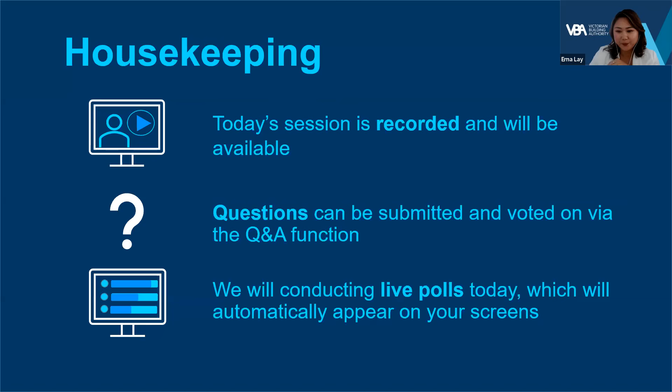Good afternoon all. My name is Christian Williams and welcome to our Practitioner Education Series webinar on waterproofing of wet areas. To assist the industry to prepare for the changes coming in on the 1st of May 2023, and in order to reduce the risk of non-compliant installation of waterproofing systems that can lead to defects such as water damage and deterioration of building elements, this webinar will provide an understanding of the key changes for waterproofing of wet areas for NCC 2022.

At the conclusion of this webinar, viewers will be familiar with waterproofing requirements applicable from the 1st of May 2023 under the NCC, and will be able to identify key areas to achieve compliance and in turn reduce defects.

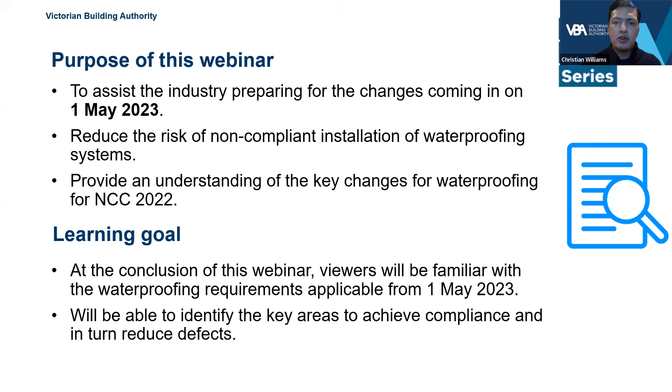Today's presentation will cover the new changes to NCC 2022 related to waterproofing of wet areas, as they differ from the provisions of NCC 2019 Amendment 1 version of the code.

We will also be covering some of the changes to the requirements of Australian Standard AS 3740 from the 2010 version to the 2021 version of the standard, which is going to be referenced in NCC 2022.

We will outline requirements related to performance solutions, such as the process for formulating performance solutions, and some specifics, such as departures from the waterproofing system specified under AS 3740.

The documentation required for the issue of building permits will be discussed, including evidence of suitability.

And to complete the webinar today, we will be going through some of the frequently asked questions live.

Before we take you through the waterproofing requirements, we need to mention one of the main changes to the NCC, which is the new SPTC referencing system.

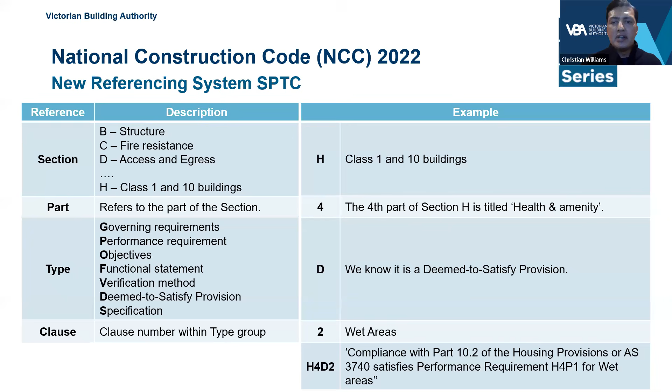The sections are then divided into parts. A section can have multiple parts dealing with different aspects relating to the section. In our example, it is Part 4, to do with health and amenity.

The type can be one of 7 options, as shown on the left, such as governing requirements, performance requirements, deemed to satisfy provisions, and specifications. In our example, the type is D, which stands for deemed to satisfy provision.

The clause is always a number, and in our example, the number is 2. So if I go to the reference H4D2 in Volume 2, it'll give me the deemed to satisfy provision for wet areas.

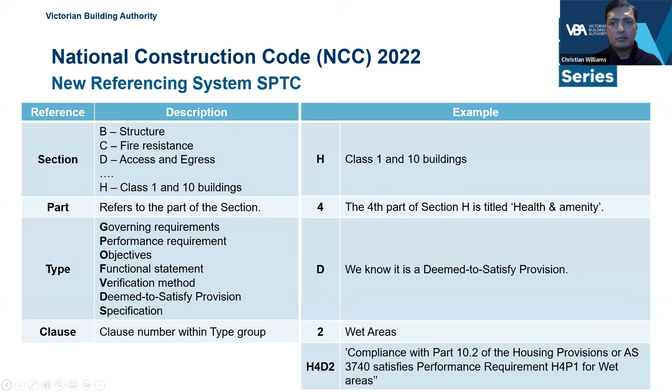The waterproofing requirements for Volume 1 of the NCC come under Part F2, which references compliance with Specification 26 and Australian Standard AS 3740 2021. Whereas Volume 2 of the NCC references compliance with Part 10.2 of the ABCB Housing Provision Standard 2022, or AS 3740 2021.

Of note is that despite using AS 3740 to achieve compliance for wet areas, Clause 10.2.1 to Clause 10.2.6 of the Housing Provision Standard must still be followed.

The main difference here is that the pathway under Volume 1 requires compliance with both the specification and the standard, and Volume 2 requires compliance with either the housing provisions or the standard.

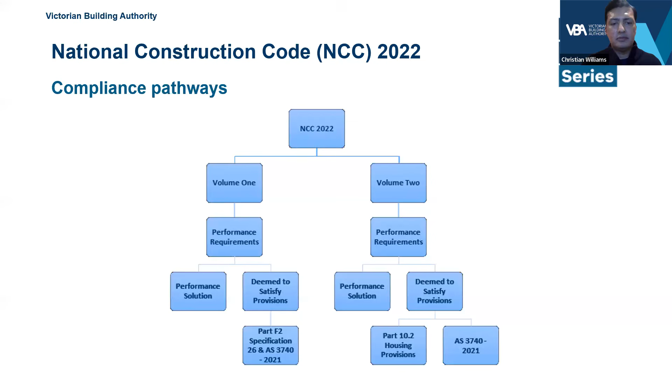Many of you will be familiar with the current waterproofing requirements under NCC 2019 Amendment 1. However, for NCC 2022, new waterproofing construction details have been added to Volume 2 under the housing provisions. This essentially means that there is now a new option for a deemed to satisfy solution that does not fully rely on having access to AS 3740 2021.

So you're all probably wondering what the differences may be. Well, there are a few differences between the NCC and AS 3740, which we will discuss. AS 3740 does contain specific construction details and options, as it is a standard dedicated to waterproofing. It's been updated in 2021, which is now the reference version for NCC 2022.

Information about the areas that are required to be waterproofed or water resistant can still be found in the NCC, within Specification 26 under Volume 1, and for Volume 2, it's under the Housing Provisions Standard. Again, the construction requirements found in the new deemed to satisfy provisions in the Housing Provisions Standard are not found in Volume 1. So for Class 2 to 9 buildings, you must adopt AS 3740.

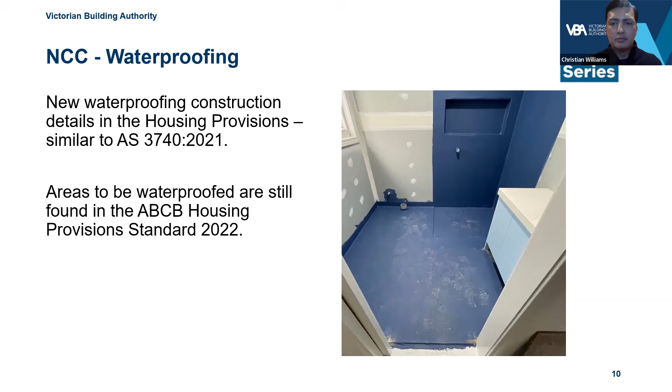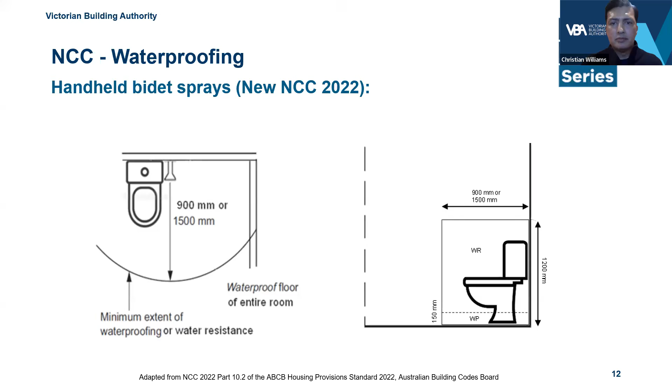In the ABCB Housing Provisions Standard 2022, which is referenced under Volume 2, the NCC now details step-down showers, which is a new inclusion. This requires that the highest finished floor level of the shower area must be stepped down a minimum of 25 mil lower than the finished floor level outside the shower area.

This is quite different to AS 3740 2021, which only requires a minimum of 15 mil from outside the shower area.

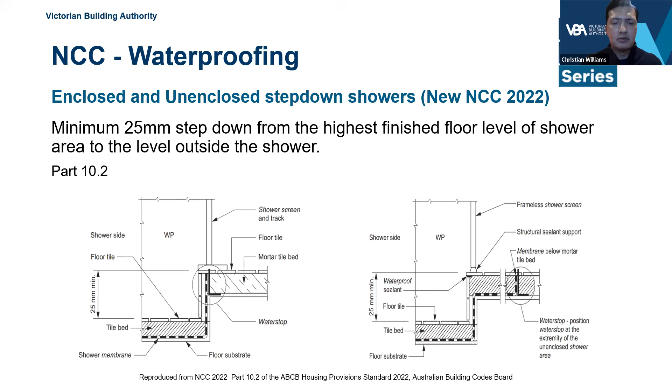So for a house, you could install it above the substrate if you're using the housing provisions instead of AS 3740. However, for a class 2 to 9 building, it will need to be recessed into the substrate.

Despite this allowance under the housing provisions, it is recommended that the flange is recessed into the substrate, or the membrane be installed over a screed, in order to ensure that water does not pond around the drainage flange.

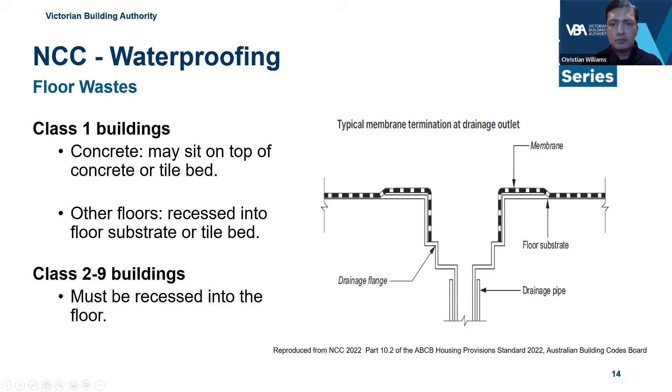It is important to note that despite the requirements for waterproofing under the housing provisions and AS 3740 that permit showers with hobs or step downs, from the 1st of October 2023, the livable housing design requirements under NCC 2022 will require at least one step-free shower in a dwelling.

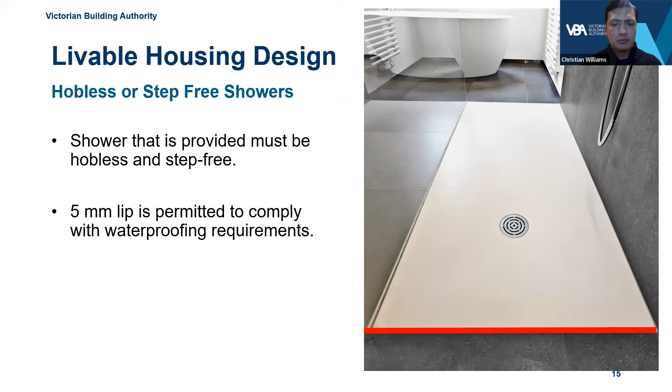The change for shower areas is that you will now need to waterproof 1800mm up and on the entire walls, not just at the junctions.

Another change is for floor wastes. The NCC 2019 Amendment 1 only required a floor waste in 3 situations: shower areas, bathroom or laundries in class 2, 3 or 4 buildings, and rooms containing urinals.

In NCC 2022, even if the floor waste is not required, but one was designed to be placed outside a bathtub or shower, then the floor would need to fall towards the waste regardless.

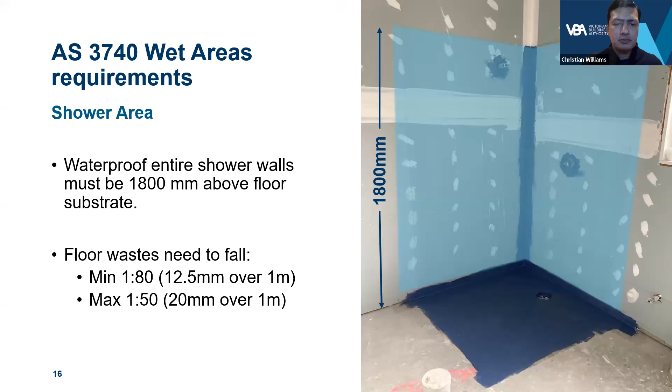Taking a closer look at the fall to the floor waste change, AS 3740-2010, which is the current version referenced in NCC 2019 Amendment 1, allows falls to the floor finishes only to be 1 to 100, where the shower has vertical separation from the rest of the bathroom, such as where you have a shower screen.

When the NCC 2022 is adopted, shower falls will be increased for falls in shower area for floor finishes to 1 in 80.

Falls in the substrate is a new requirement, which means that the floor waste in a wet area and the membrane applied to the substrate must be a minimum of 1 in 100 fall towards a floor waste.

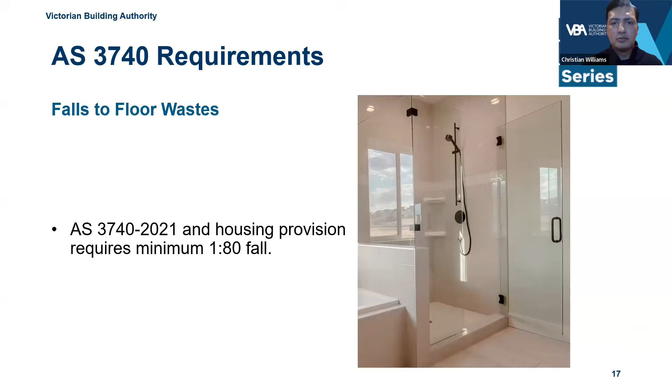Another noteworthy change between the 2010 and 2021 standard is that particle board sheeting to AS NZS 1860 is not allowed to be used as a water-resistant substrate material for floors.

The 2021 standard also makes mention that a visual inspection must be undertaken. Who can undertake this inspection is not specified. It could be the builder, the waterproofer, a building surveyor, inspector, or engineer.

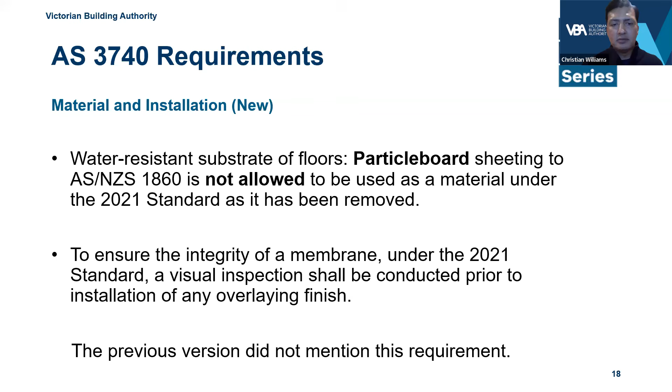There are a number of other miscellaneous changes to AS 3740 for 2021. Coloured figures have been added to provide better clarity on installation requirements. There has been an expansion of the surface preparation requirements to include provisions for preparation of substrates, wall sheeting, and preparation of rendered surfaces. Shower and bath scenarios have been expanded to include additional installation requirements and examples.

Additional materials have been added for both waterproof substrates and surface materials, and water-resistant substrates and surface materials for both walls and floors.

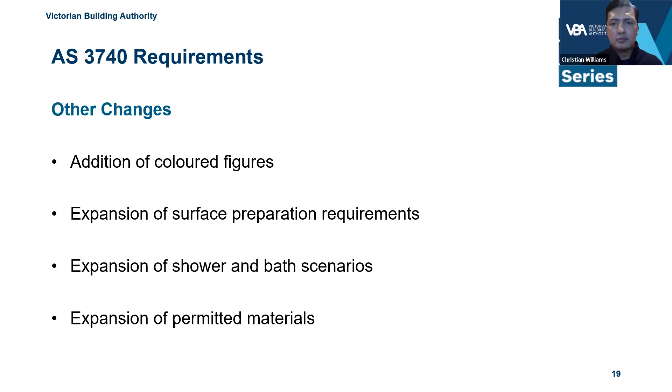There's been a slight change to the requirements for bond breakers for Class 1 membranes from AS 3740-2010. A bond breaker is a system that prevents the membrane bonding to the substrate in order to prevent failure of the membrane.

The membrane can have restricted or non-restricted movement, depending on its bonding to the substrate. The way the membrane is bonded also affects the extent of the flexibility and elasticity of the product.

For Class 1 membranes with an elongation at break less than 60%, a minimum bond breaker width of 75mm is required with a 6mm backing rod under the 2010 version.

However, the use of the correct class is important, as over-elongation of a membrane can cause stress on the membrane that can lead to failures.

So, for example, under the 2021 version of the standard, a Class 1 membrane with an elongation break between 10% and 50% now requires a minimum bond breaker width to be increased to 100mm, with no backing rod specified.

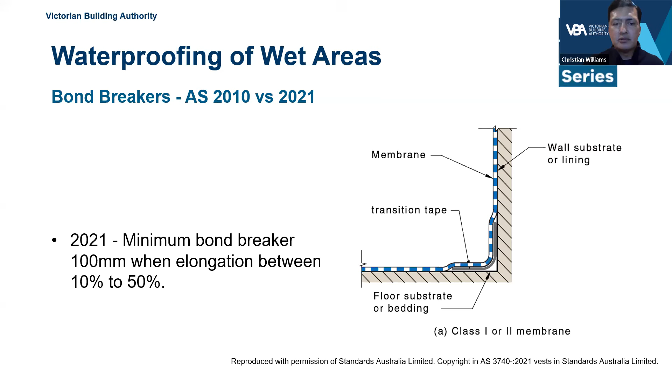AS 3740-2010 detailed the termination of a membrane to a drainage channel.

AS 3740-2021 also covers the specific details, but now calls them linear drainage connections, and now requires the waterproof membrane to either be installed above or below the tile bed or screed.

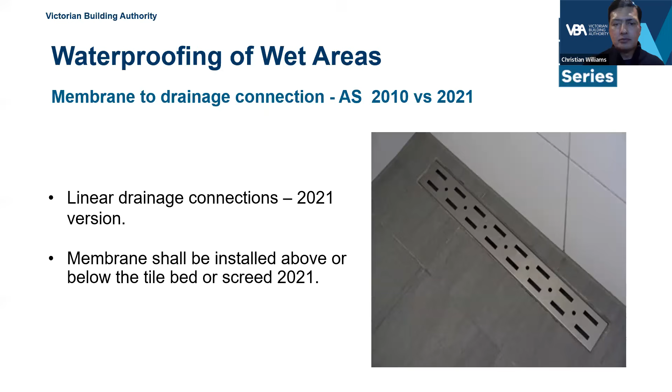Under AS 3740-2010, the membrane drainage connection requires the waterproofing membrane to be terminated at the drainage flange or outlet.

AS 3740-2021 now requires the waterproofing membrane to be bonded onto the leak control flange. Also, the waterproofing membrane can be terminated horizontally or vertically at the flange. You can refer to figure 4.3.1 and B in the 2021 standard for further details.

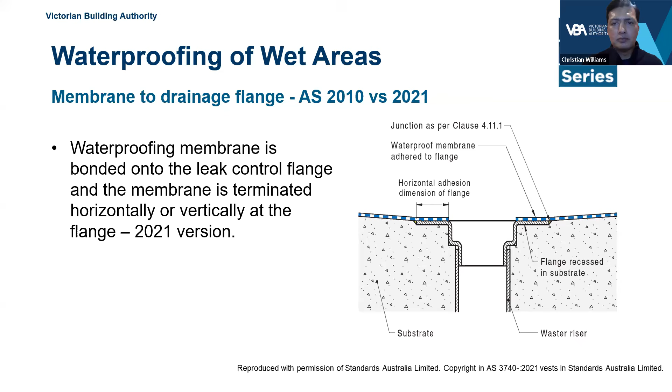Under the 2010 version, requirements for perimeter flashings or membrane termination in bathroom areas was 25 mm from the finished floor level. However, now under the 2021 version, it also permits the membrane or perimeter flashing to be 150 mm from the structural floor in the examples for protection of doorways.

The 2021 version of the standard now includes an example for protection of steel frame architraves at doorways, and it now requires a 3 mm to 5 mm lap over the architrave.

As discussed in the earlier slide, the use of particle board flooring substrates in wet areas for the 2021 version is no longer allowed to be used.

In addition, where a water stop was required at doorways under the 2010 version of the standard, the membrane was only required to terminate to create a waterproof seal. But now under the 2021 version, the waterproofing must extend up the water stop angle.

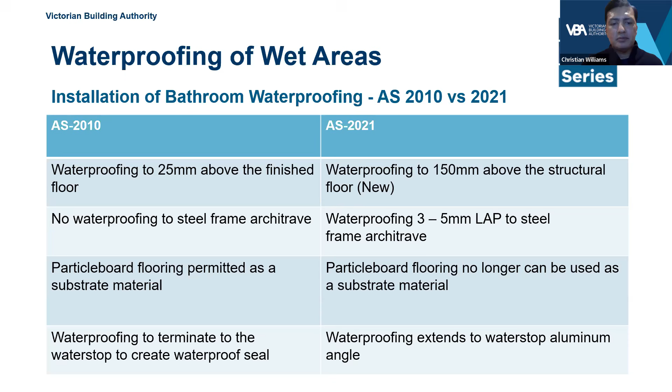Something new for AS 3740-2021 is that domestic wet areas are now classed into 3 categories. This is based on the risk of water, hazardous conditions, damage to the building structure, and moisture causing potentially unhealthy conditions.

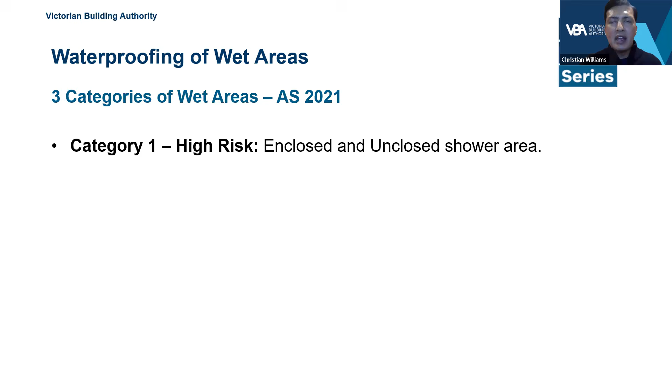Category 1 is the high risk, which can consist of, for example, enclosed and unenclosed shower areas. Category 2 is a moderate risk, which is areas such as the entire bathroom area outside an unenclosed shower area or outside an unenclosed shower over a bath.

Category 3 is low risk, which are areas such as the bathroom area outside an enclosed shower area, or a bathroom area without a shower area, or a laundry without a shower.

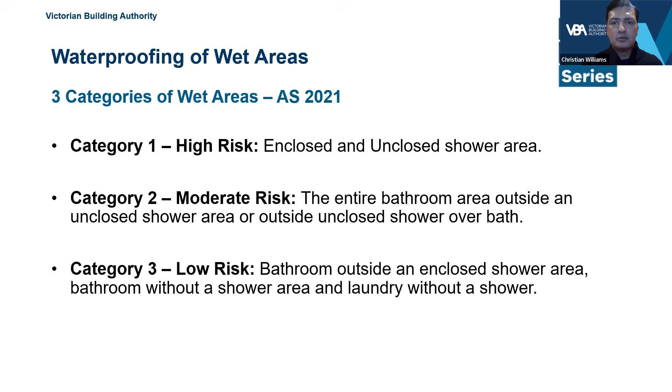AS 3740-2010 only covered the general requirements for the minimum fall to the waste for bathroom floors, which was 1 in 100, for the fall to the waste in the shower area of 1 in 100, and for other shower areas being 1 in 80.

AS 3740-2021 sets the requirements for falls to the floor waste based on the 3 risk categories mentioned earlier. Category 1 areas, such as the fall to the waste in shower areas, the minimum fall must now be 1 in 80.

Category 2 areas, such as the fall to the waste on floors adjacent to the shower area, the minimum fall is 1 in 100. And Category 3 areas, such as bathrooms with fully enclosed showers, where the floor adjacent to the shower area has no floor wastes, there are no requirements for falls, and the water shall be retained only in the wet area.

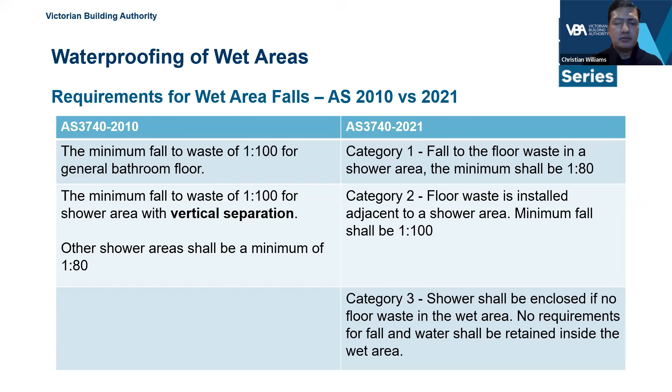This part of the webinar discusses performance solutions. In order to achieve compliance with the NCC, the mandatory provisions are the performance requirements. As shown in the flowchart earlier in the webinar, there are 2 main pathways for meeting the performance requirements: by using a prescriptive deemed to satisfy solution, or by formulating a performance solution.

In accordance with clause A2G2(1) of NCC 2022, a performance solution is achieved by demonstrating compliance with all relevant performance requirements, or by a solution at least equivalent to the deemed to satisfy provisions.

Any solution that does not utilise a deemed to satisfy solution must be treated as a performance solution. This includes the use of accreditations, such as CodeMark certificates that certify compliance with performance requirements, and certificates issued by the Building Regulations Advisory Committee, or the BRAC, and even the use of an NCC verification method.

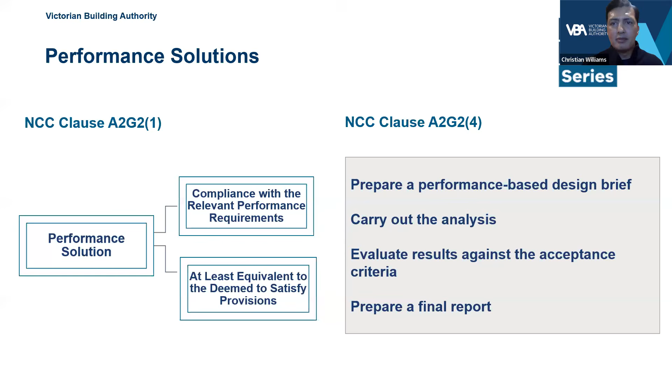We'll now discuss some specific examples of performance solutions.

In recent times, we've seen an increase in the use of polished concrete floors in wet areas. The deemed to satisfy provisions under the housing provisions and AS 3740 permit the use of polished concrete floors where a water-resistant floor is only required, provided the concrete has been treated to resist moisture movement.

Where a floor is required to be waterproof, polished concrete would need to be treated as a performance solution. This is due to concrete only being considered a water-resistant substrate and a water-resistant surface material.

However, there is a method for using polished concrete under the deemed to satisfy provisions of AS 3740, which is to apply a compliant waterproof membrane over the concrete substrate, such as a concrete slab, and then to pour a topping concrete over the membrane in accordance with the specific provisions under AS 3740.

The housing provisions does not have a specific method for using polished concrete floors, but the same method of applying topping concrete to a compliant membrane installation can be used. Any other method of using polished concrete must be treated as a performance solution.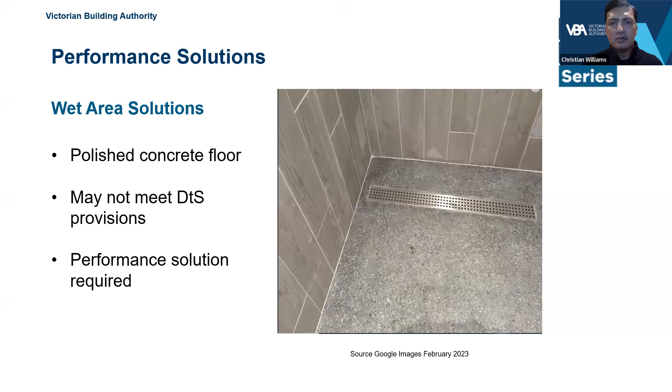There has also been an increase in recent times in the use of timber flooring in wet areas. The deemed to satisfy provisions under the housing provisions and AS 3740 no longer have provisions for using any type of timber flooring as a substrate.

Timber flooring is also not a compliant surface material in both water resistant and waterproof applications in AS 3740. Where timber flooring, including particle board, is proposed as being used as a substrate or surface material in a wet area, it would need to be treated as a performance solution.

However, there is a method for using floating timber flooring that complies with NCC 2022. This is where the floating floor is laid over an already compliant installation. In other words, there must be a compliant substrate and surface material in place prior to laying the floating floor.

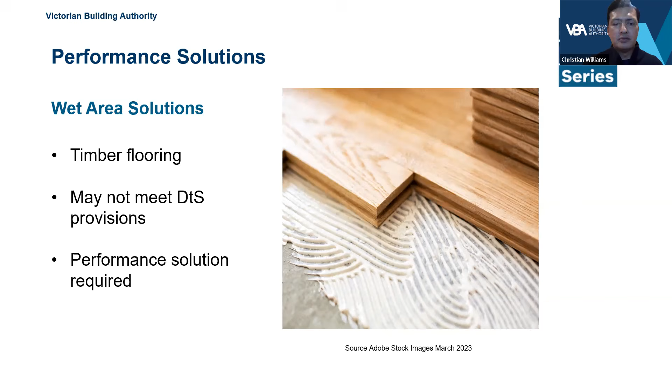The final part of the webinar before the Q&A session will be on the minimum requirements for building permits. When making an application for a building permit, it is expected that drawings include sufficient detail for the relevant building surveyor to determine compliance with the NCC.

This includes drawing and section details of the wet areas, showing how compliance will be achieved with the housing provisions or AS 3740.

Details for shower areas and bathroom floors must show all materials used and how they are to be installed, including but not limited to any floor wastes, membranes, water stops, and bond breakers. It is not sufficient for the drawings to just include a general note specifying compliance with AS 3740 or Part 10.2 of the housing provisions.

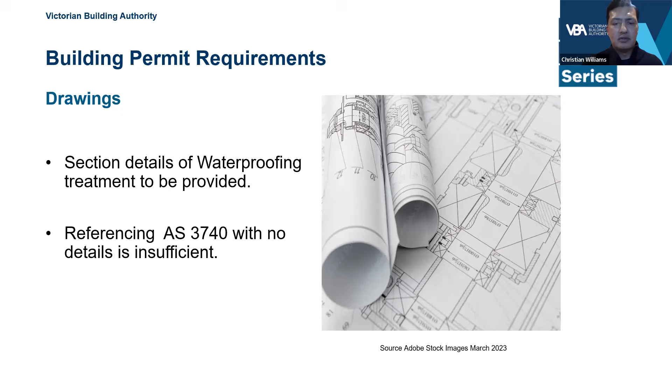We'll now discuss some of the documentation requirements for waterproofing of wet areas. In line with Part A5 of the NCC, all products, materials, and forms of construction must be supported by evidence of suitability where required.

In terms of wet areas, there could be a number of products, materials, or systems that will require that evidence is provided to the relevant building surveyor to support the solution used to achieve compliance with the NCC.

An example of this could be where a polished concrete slab is being used in an area that is required to be water resistant. As the deemed to satisfy provisions under AS 3740 require the concrete to be treated with a product that restricts moisture movement, evidence of suitability that the product achieves this requirement must be provided to the relevant building surveyor for approval prior to installation.

Another example is the use of a waterproof membrane product in areas required to be waterproof. The housing provisions and AS 3740 require that the product used complies with AS NZS 4858 wet area membranes. Therefore, evidence that the product complies with this standard must be provided to the relevant building surveyor for approval, again prior to installation.

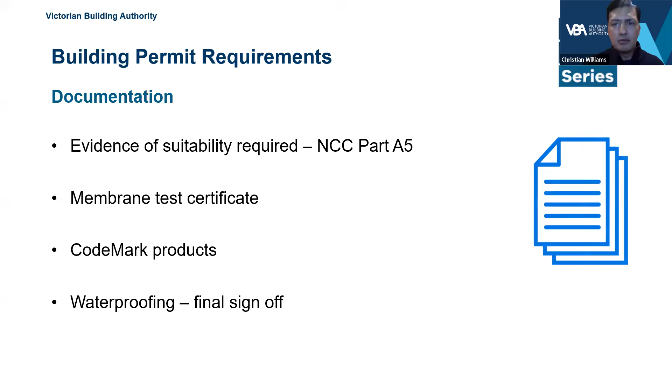So to summarise the webinar today, you have heard about the changes to the NCC, differences between the housing provisions and AS 3740/2021, and between the 2010 and 2021 Australian Standard versions. You have also been made aware of the processes related to performance solutions for wet areas and have been advised what is required in relation to waterproofing for wet areas for building permits.

From this webinar, you should now be familiar with the key changes to be released under NCC 2022 on the 1st of May 2023 for waterproofing of wet areas, and this should assist you in mitigating defects and installation non-compliances. I thank you all for your attention during the webinar, and I will now hand back over to Erna.

Thank you, Christian. That was great. We will now move to frequently asked questions and answers that the team receives relating to waterproofing in wet areas. Christian, are you able to advise the audience - I know you touched on this already - do I need a waterproofing certificate when work has been completed?

Thanks, Erna. Yes, I certainly can. So there are no prescribed certificates under the Building Act or regulations or NCC for waterproofing. However, at the end of the day, the relevant building surveyor must be satisfied. Evidence of suitability is required for waterproofing to demonstrate that the work undertaken complies. In terms of the membrane, AS 3740 requires compliance with AS 4858. Therefore, evidence will need to be submitted to the relevant building surveyor from the product used for the membrane to show compliance with that standard. In addition, most building surveyors request that a stat dec or a letter of compliance is submitted to them, noting that the installation complies with AS 3740.